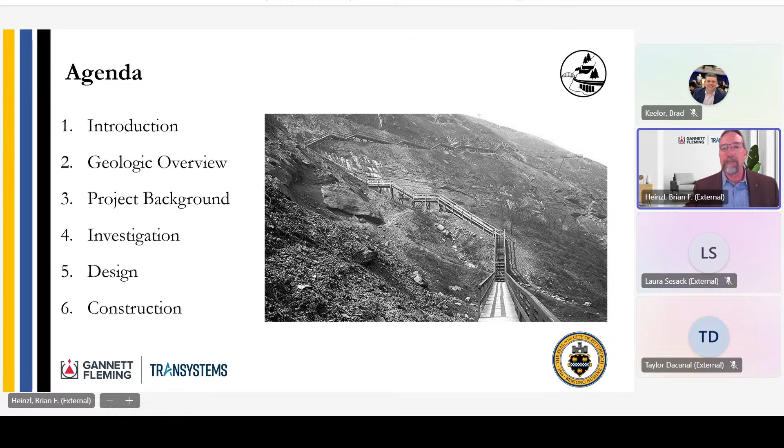Before we start into the specific projects, the project team, Gannett Fleming, is working for the city of Pittsburgh. The city obtained a grant through FEMA, facilitated by the Pennsylvania Emergency Management Agency. We meet with them monthly on progress to bring these 3 projects to completion. I believe we started on these in 2021, and they should all finish by the end of this year.

Before we get into the specific projects, I wanted to go over some of the geologic background of Pittsburgh. You see the Golden Triangle right there in front of you. These 3 sites are up on Mount Washington, which is a steep valley slope. This map was generated by Allegheny County, and it shows that all of these slopes around Mount Washington are susceptible to landslides and rock falls.

This is some of the common geotechnical constraints we face in Western Pennsylvania. We have deeply incised valleys downcut through geologic time, with steep slopes and stratigraphy that includes competent sandstones interbedded with weaker claystones, shales, limestone units, and coal seams. The less resistant units degrade faster than the resistant units, causing rock falls and toppling, and also causing colluvial deposits at the bases of the valley or on intermediate slopes where less resistant units lie on top of more resistant units.

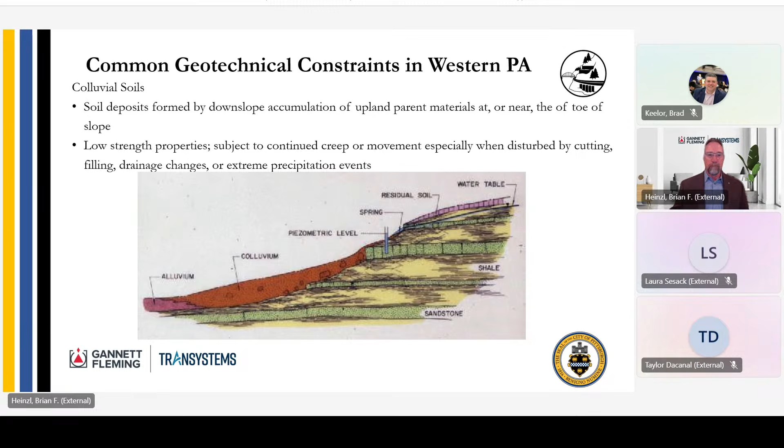Oh, going the wrong way. Hold on, there we go.

This is a geologic section of Allegheny County. We've outlined in blue some of the prevalent marker beds: the Pittsburgh coal, the Ames limestone, and the Upper Freeport coal. Also shaded in red are our problematic red bed claystone seams, being the Schenley red beds, Pittsburgh red beds, and some other red bed units. That's the setting of this project.

Our project is basically on Mount Washington. I believe the Pittsburgh coal was near the top of Mount Washington, which was named Coal Hill back in the industrial age, and is now Mount Washington, because that's probably not very aesthetic to call it Coal Hill anymore, except for us engineers.

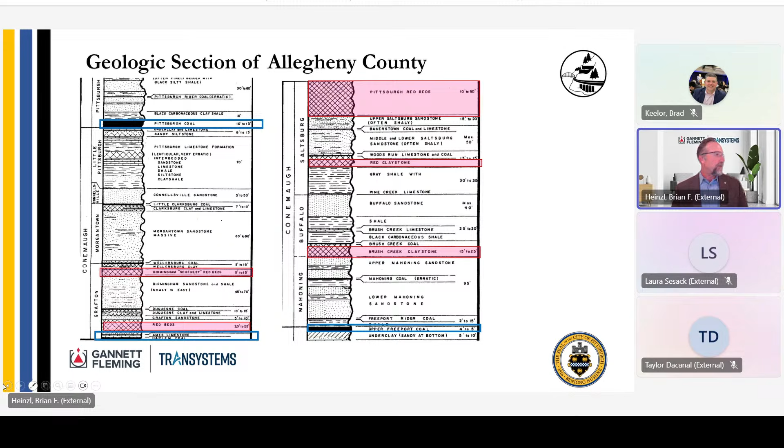We'll go on to the project background. We have 3 sites that the city obtained a grant for through PEMA and FEMA. This is the Greenleaf Street site, a catastrophic landslide area. The Reese Street site is a smaller slide but has some important properties around it. Above the Liberty Tunnel, the William Street site has several instabilities, landslides, and rockfall issues we were addressing. Our objectives were to protect the roadway and properties, and also consider the city's Emerald View Park, the green space all around Mount Washington that's undeveloped land, with a series of trails the city maintains.

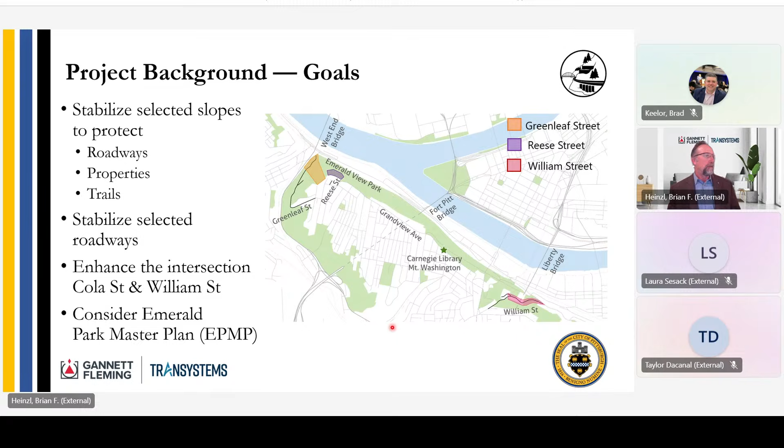This is the Reese Street site. This is the top of Mount Washington. There's a radio tower on top of this building, not visible in this view, but very important to the Pittsburgh area. A landslide occurred behind the structure, and this retaining wall supports the structure shown here. The material moved downslope, creating steep outcrops encroaching on the Emerald View Trail, which runs below the site across the middle of the hillside. There's potential for rockfall and slide debris to impact the trail and other infrastructure downslope, including the railroad and the major state route at the base of Mount Washington.

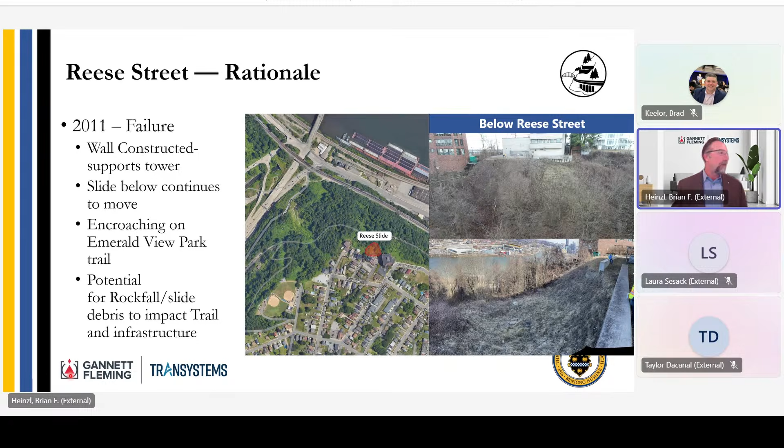Our objective was to construct something to mitigate this slide. This is the typical section we came up with. Our treatment was here, in the slide area below the wall. What we came up with is a structural barrier of closely spaced caissons to restrain the upper slope movements above this steep rock outcrop.

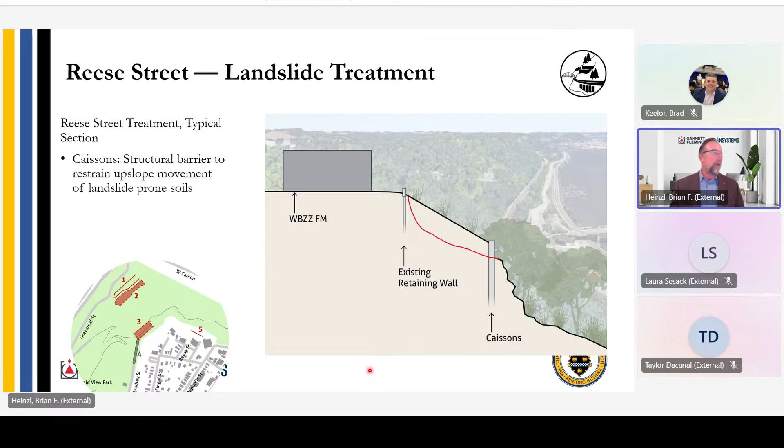And this is just the limited disturbance for our project site. We stayed up out of the park for the most part, and we were up against this high-rise building next to us, and this is the radio tower just above us. So it was a very, very tight site.

It's called Reese Street. Reese Street is a city street that dead ends at the site, but you can't access the site here, and I'll show you in a minute - I think there's other better photos. The local residents have appurtenances built around their structures there.

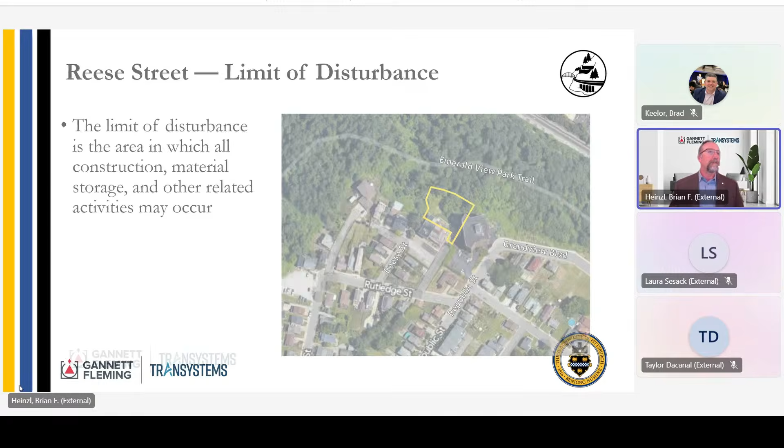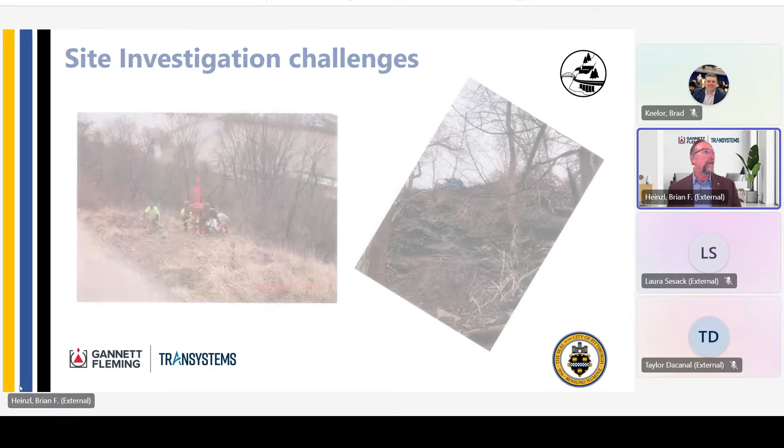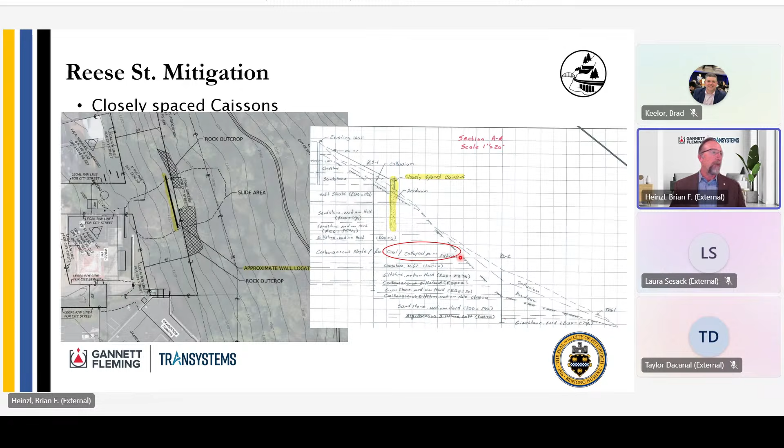So, very challenging terrain. This is our typical section here, and this is the depiction of the site with the trail. This is where we wanted to construct the caissons through the slide, and this is it in cross section. Through our subsurface investigation, in some of these borings, we did find the Pittsburgh coal horizon that I mentioned - a coal and collapse mine interval here that we had to address prior to constructing the caissons.

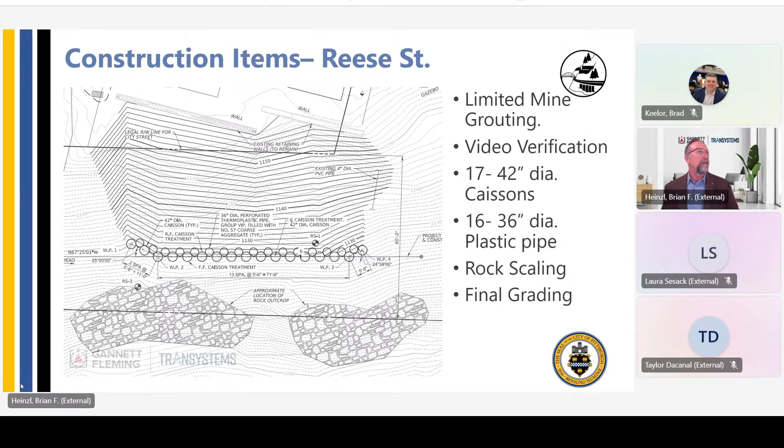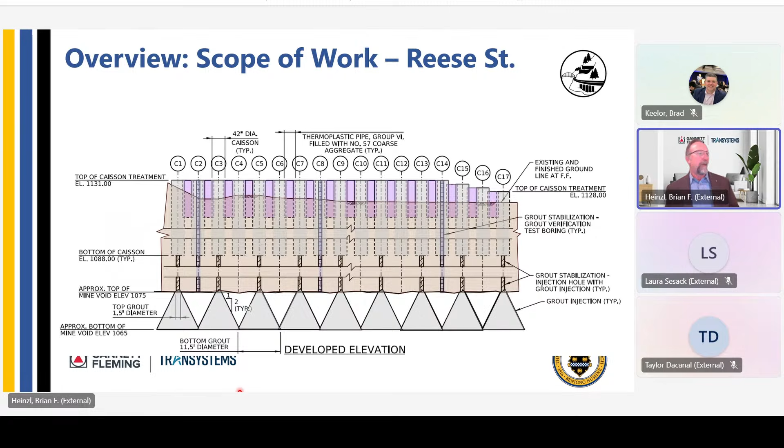We had a little bit of reveal here, and I'll show you that. This is basically some as-directed rock slope scaling. This is kind of what we had to come up with, a way to convey to the contractor which rocks to take off the slope.

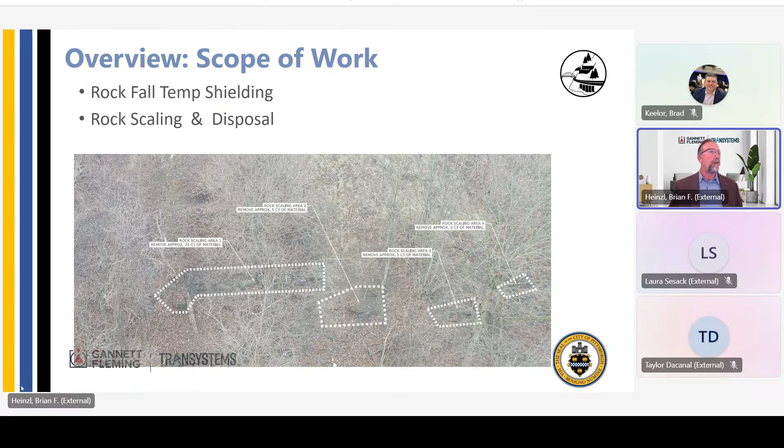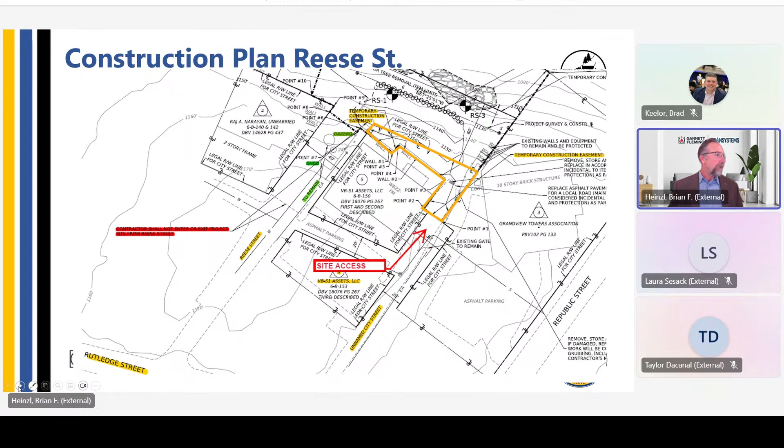And then here again, this is a construction plan showing the access at Reese Street. All these appurtenances were to remain. So we basically came up through the alley with all the equipment and down on this little postage stamp of a site. You'll get a better perspective of that with some of the construction photos.

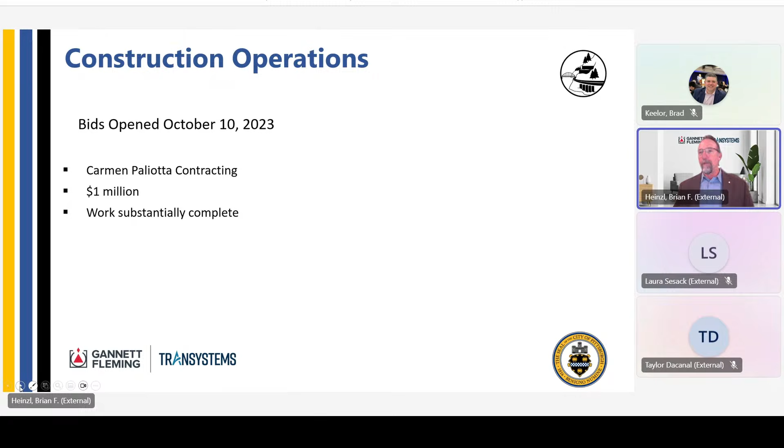Construction bids were opened in October of 2023. Awarded to Carmen Paliotta Contracting, a local contractor, for about $1 million. And the work right now on this site is substantially complete.

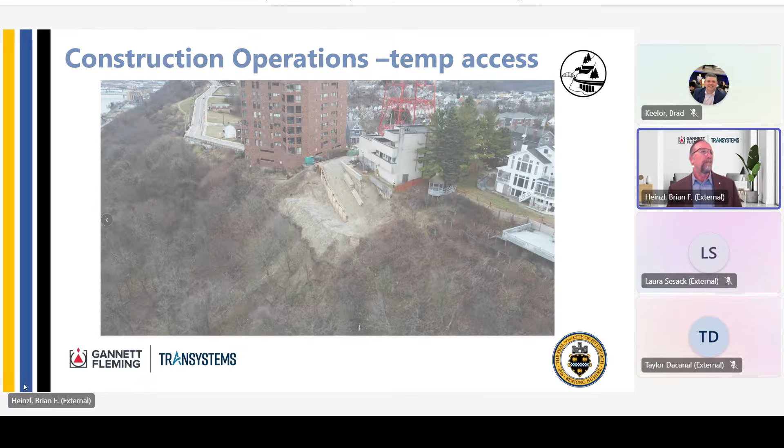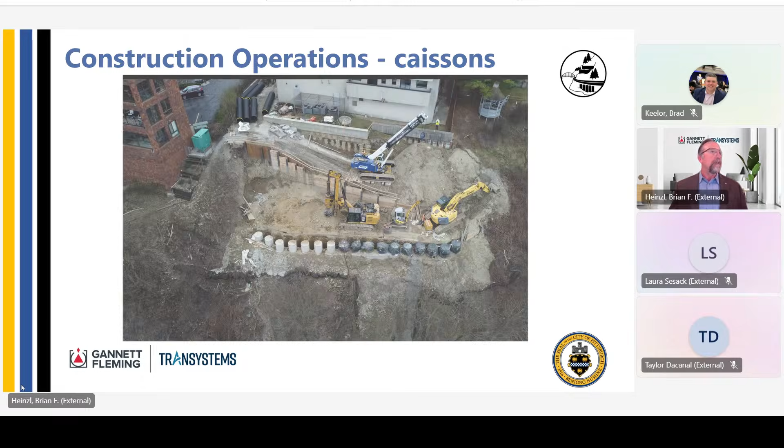To create this bit of, I think it was a 5-foot reveal we ended up with behind here, and then some regrading filled this all back in later when they removed all the temporary measures. And then this is basically the completed site. This was done, I do believe, by - I think this is April or May. So this one was substantially complete.

One of the things the city wanted us to do here - you can see all the caissons here - we had added pigmented concrete to the top of each pour, so this would blend in and you wouldn't see, what everybody calls it, the ugly gray concrete wall sticking up in the middle of the hill. That was very, very important to the city there, especially because it's part of their Emerald View Park.

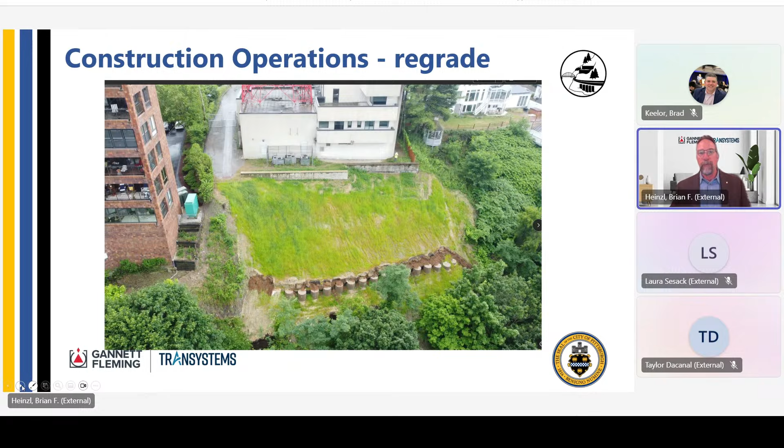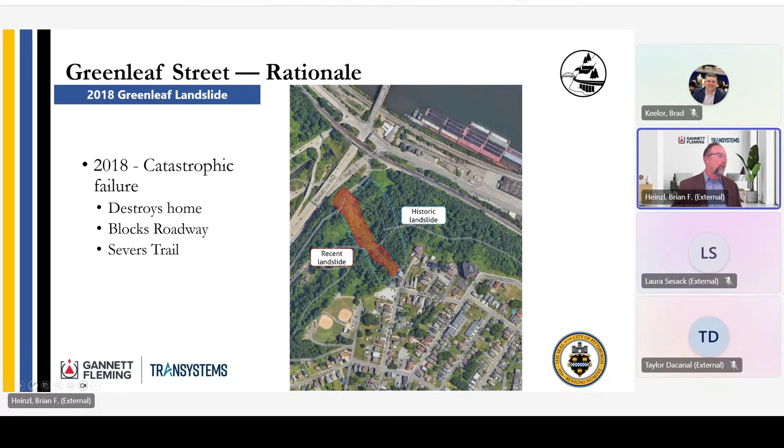So here's an aerial view of the catastrophic failure. 2018 was basically one of the years in Pittsburgh that we had a record amount of rainfall, which triggered a lot of landslides. Those of us that are local geotechnical engineers were very busy that spring trying to repair infrastructure, kind of similar to, but not nearly as bad or widespread as what's going on in Asheville, North Carolina right now.

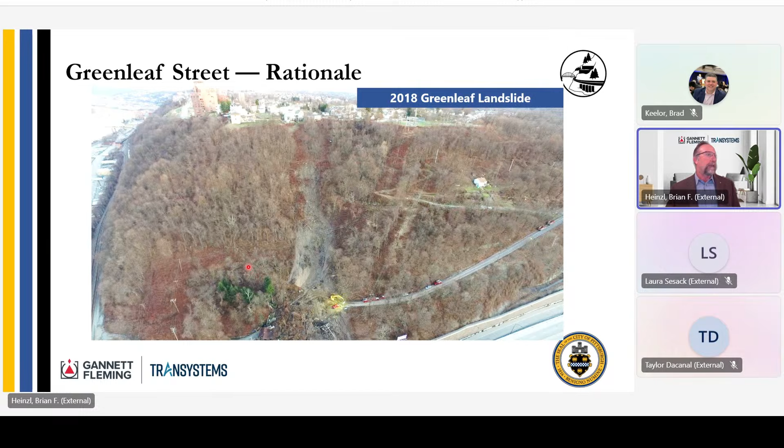Luckily. So this is the house that was removed. It was here, so you can see this was the trail came up across the site here at the headscarp of the slide. This is part of an ancient landslide area here that was also reactivated because of all the moisture and some other influences that caused this failure.

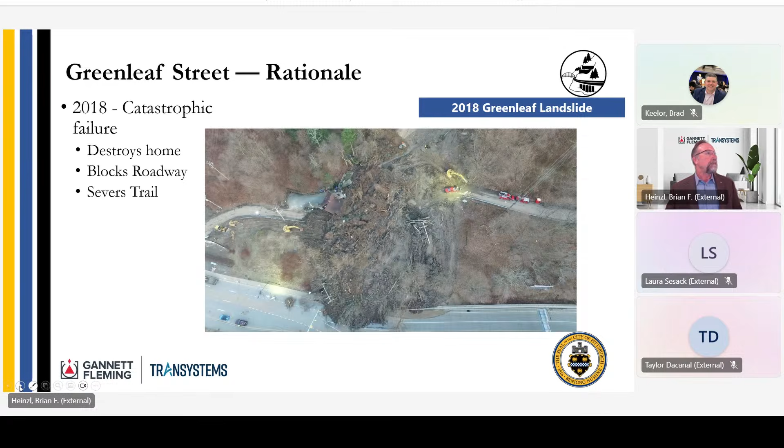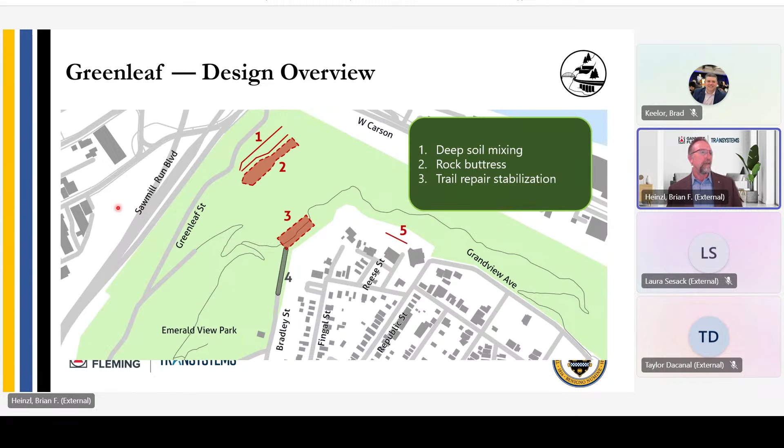So we came up with a couple of different designs, and because of the depth of the colluvium here at the base, we came up with some deep soil mixing lines, represented by these two lines of material, and a rock buttress on top of that, and then up here a separate remediation for the trail. Basically, we have a combination of micropiles, geogrids, and soil nails because of some of the site constraints here.

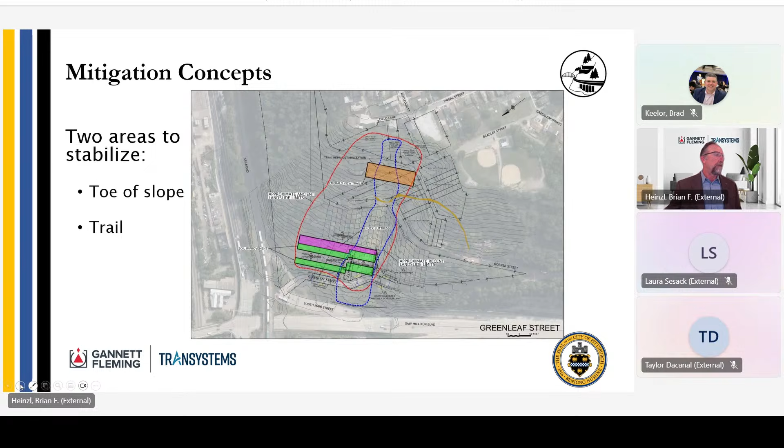So we came in here with some deep soil mixing panels. I believe the widths changed. I think their lower one was 15 feet wide, and I want to say there were 10-foot spacing, 4-foot thick panels at a 10-foot spacing. And the upper one, I believe, had some different shapes and sizes, 30 feet by 4 and 15 by 4, I think, when you get out into the ancient landslide area.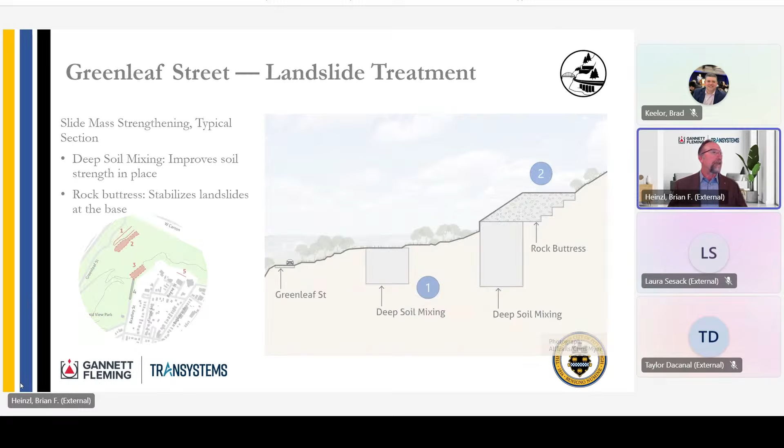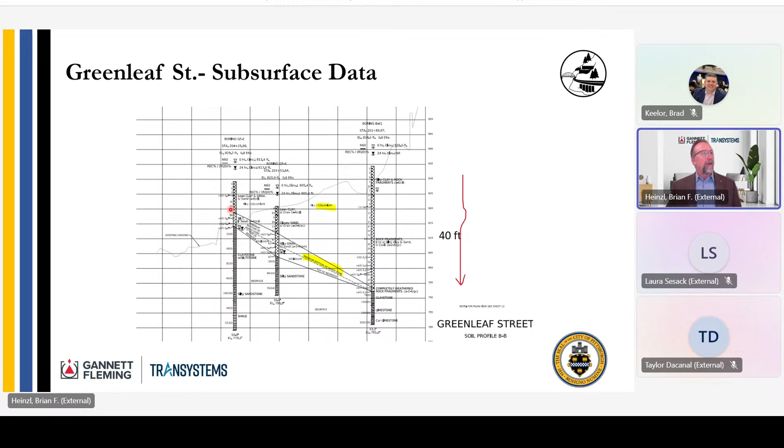And we came up with a minimum bottom of mix zone. These were our targets on AA, and then you have the same thing on BB, which is kind of the opposite direction of the boring. So this wasn't something that we could come up with a single specific section or depth. And that's kind of one of the reasons why we went with deep soil mixing, because it's a little versatile. You can have one panel a lot deeper than the other, but we did need to get the 40 plus feet with these theoretically.

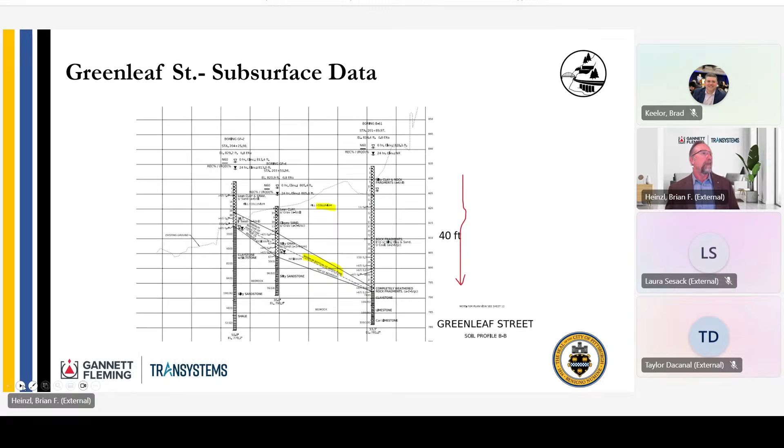And this is some of the segments. Like I said, we had 3 different treatment segments here. This is through the active slide. This is Greenleaf Street, where we did some roadway reconstruction. And this is another line of columns through the ancient landslide area. We actually had 2 there, and then the rock buttress up above.

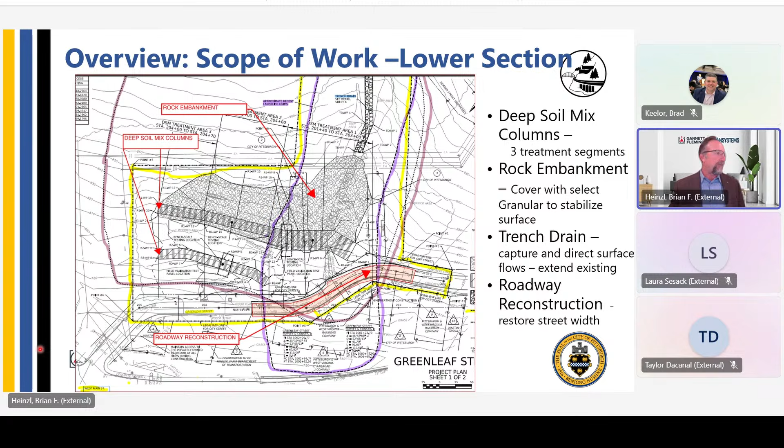We stopped this rock buttress at this location, which worked out well. There's some wooded area up here that seems stable from this tree line. But we have a lot of power lines running across this site, so we can only build our rock buttress up so high and still get under the power lines without interrupting any of their facilities.

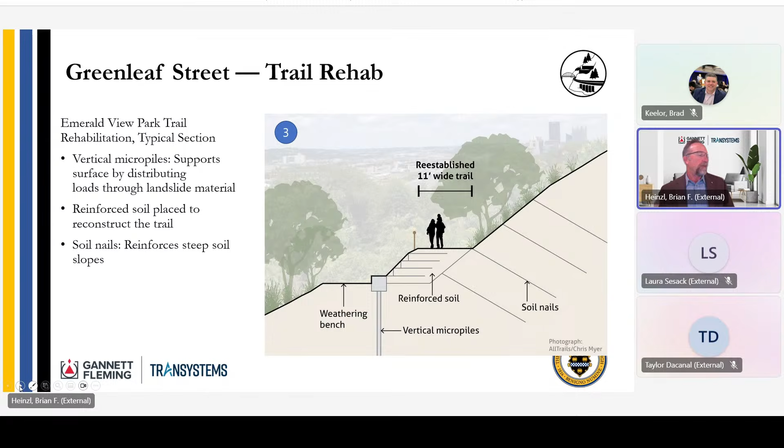And this is the trail area. This was pretty much obliterated by the slide, and there's a small walking path here. So what we're doing is rehabilitating this with soil nails on the slope to create our path, then build the path up with geogrids and reinforce it with some vertical micropiles down into competent material with residual soils and bedrock.

This cross section shows our residuum. The bedrock is not too deep. These are 10-foot sections, so we were able to do something a little smaller up here, but we had to get through the micropiles in the front here into the residuum. This area here is untreated - it could still creep, but it won't affect the path for the Emerald View Trail.

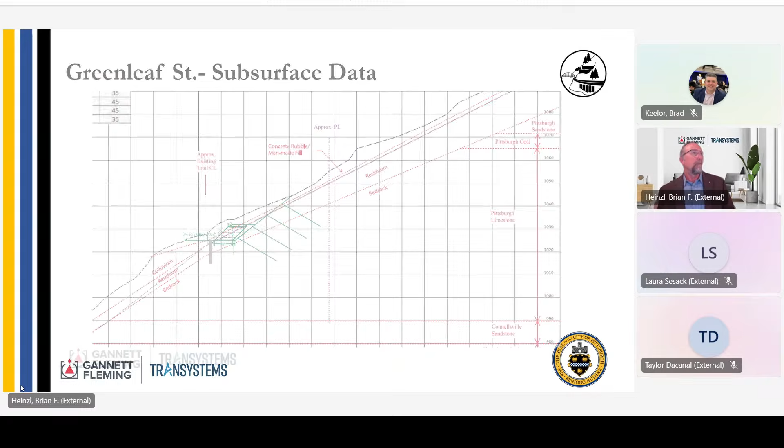I guess the sequence would be cut this down, put the soil nails in, put the micropiles in, and come back through with the geogrid reinforcement to recreate the path. I do believe this is 200 to 300 feet across here total.

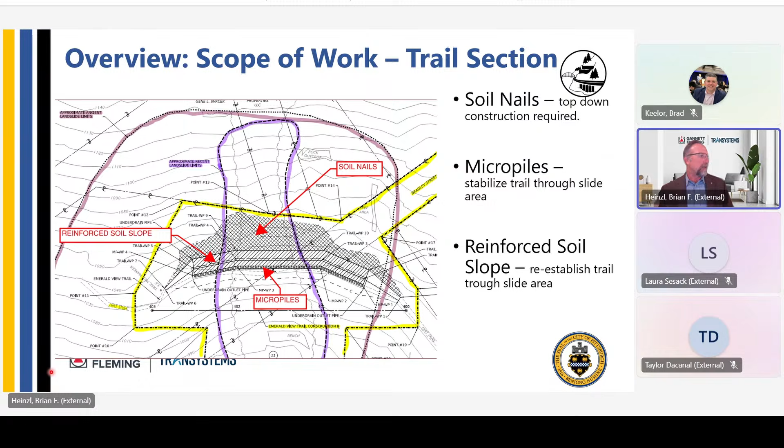So again, these bids were open at the end of last year. Carmen Paliotta was a successful bidder on this one as well. The contract price is $4.4 million. The work is ongoing now, and we estimate completion in December. This is the rig they used to create the deep soil mixing.

Actually, they did a VE. They didn't mix soil - they came in and did partial displacement concrete piles overlapping, creating the same panel, which saved us time for testing and sampling test panels, because we knew what the concrete piles consisted of. So the contractor had his engineer go back and verify the stability worked out with the deep partial displacement piles, so we continued with that.

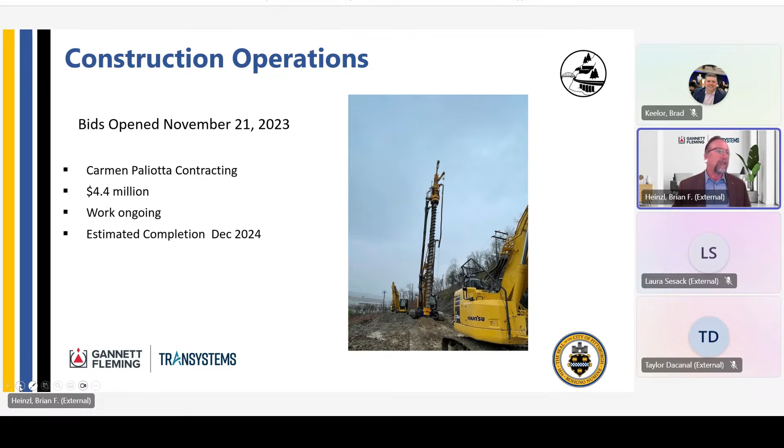They're working on that right now. This is the upper bench, I believe, some of the colluvial area, creating a working platform for this machine to travel back and forth, creating the panels.

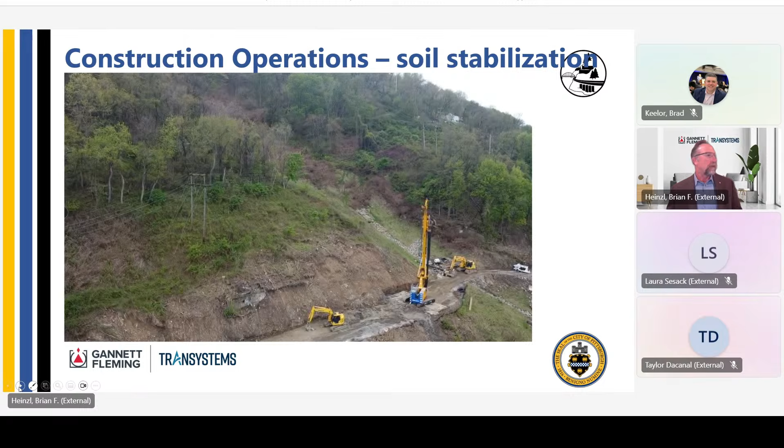And this is just another view from below. This is Greenleaf Street here. The upper panel here is complete, and they're working on the lower row now. You can see this area here was the partially repaired active slide from 2018. The city installed some drainage here and did a bunch of earthwork just to remove the slide debris.

So we're going to do some of the improvements on that. I don't know if you can see the utility lines coming up through here, but they go right over the rig there. This is just another view of the bench - I believe all the panels are in - and this is the finished grading of the lower bench, as you can see down into the west end and the west end bridge in the background there.

So you'll see a rock buttress up across here. The objective here is we will build a rock buttress, but we'll also choke it with granular embankment and plant grass and some trees on it, to facilitate the greenery and create the park-like atmosphere for the city.

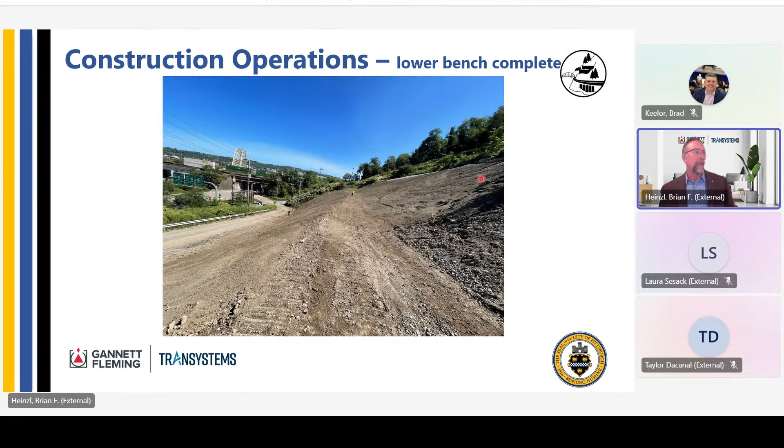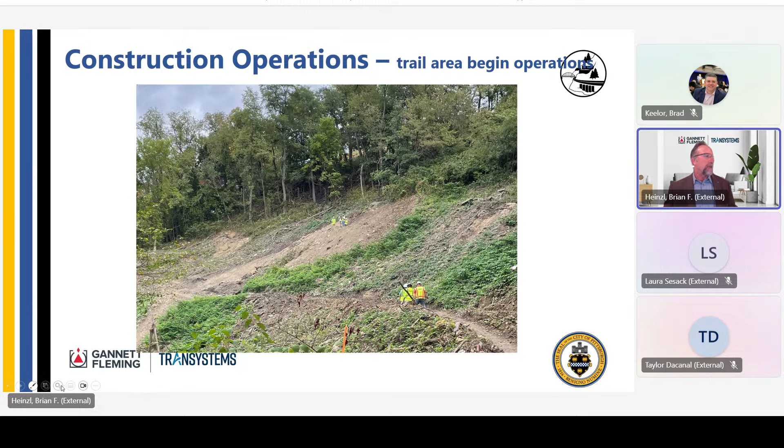This is the upper part, which the contractor is just getting started with. This is the trail now coming across here. This is the headscarp of the old active slide, and they're creating a bench here that we're going to do some test soil nails on in the next week or so.

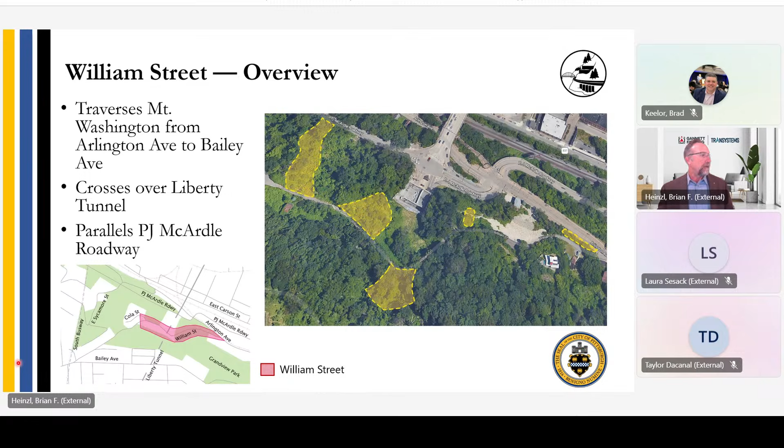And this is a view of the street. The street was a narrow one, one lane down the hill here. It was closed off. It's been closed since 2019 since the activity there. I do believe 2018 this area was closed. I think other parts of it were closed too. It was open to here, but then the other slide I showed you in 2019, the lower portion was closed.

I'll move forward here. There's a lot to cover on this site, which we won't get into very much due to time, and we're still working on it, but we can come back and recapture this at some other later date.

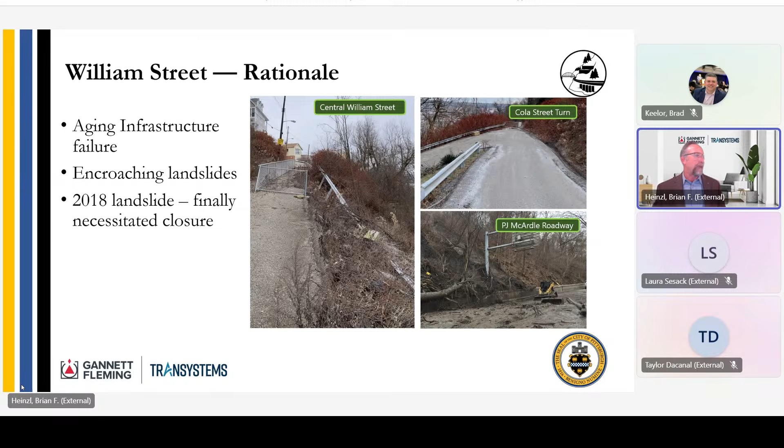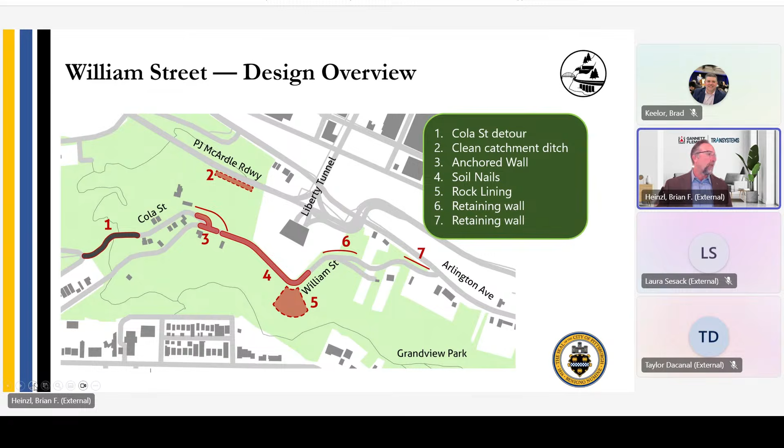Based on some options we looked at with the city, we determined this portion of William Street would remain closed to vehicles, but we'd reopen it as a shared use path for pedestrians and bicyclists, allowing access to Arlington Avenue bus lines and Bike Pittsburgh, but no longer vehicular traffic. So we were able to narrow the section up a little bit.

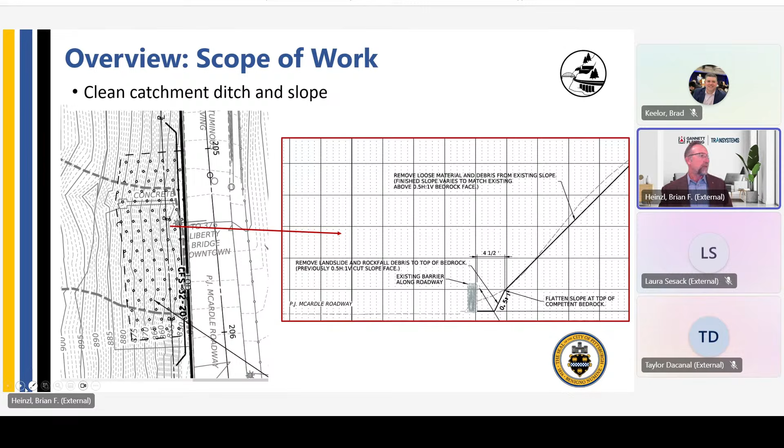This is just a view of cleaning off some of the slide debris. We cleaned out the ditch here, which actually worked pretty well. We had a limited closure on P.J. McArdle Roadway—it's a very active thoroughfare from Liberty Bridge downtown to Mount Washington for daily commuters. We were able to shut it down over a weekend to do this cleanout and remove a lot of the slide debris, which was very successful.

This is a depiction of the anchored wall. The new Cola Street turn—William Street is up here. You can see we moved Cola Street out, made it a little wider on that reveal, and this is the anchored wall below it.

Here's a plan view of the similar thing. Again, I wanted to highlight the intersection improvements. This was the existing hairpin turn, and now we have a larger radius to allow emergency vehicles to make that turn and service the residents.

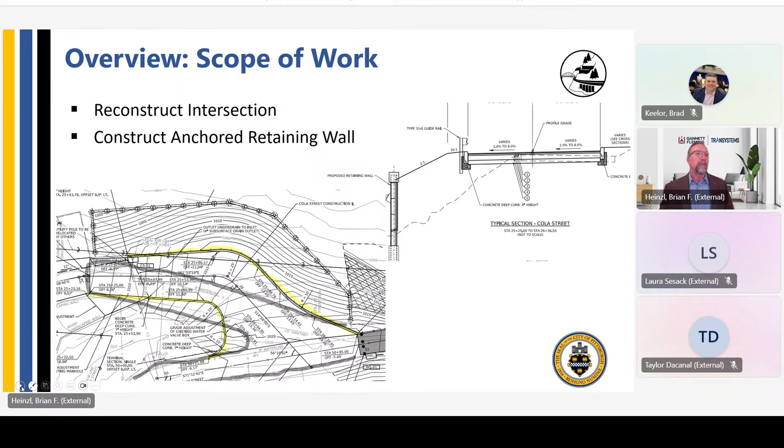This is the converted trail. To restore this area, we designed some soil nails to come in here, and we have permeable pavement going in here, along with a small rock buttress.

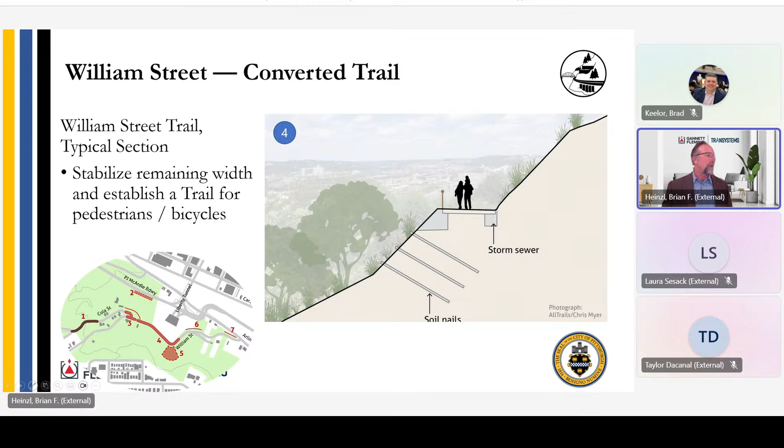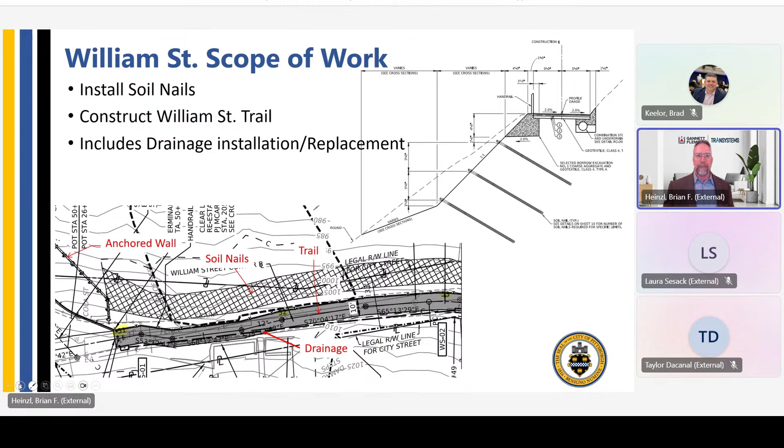Some other areas here—this is a plan view. This is the area of the soil nails, the drainage, the anchored wall, and this is going to be the trail. I believe we had around 300 nails through this area. We have rock lining going in here—I don't have a good picture of it, just a general schematic.

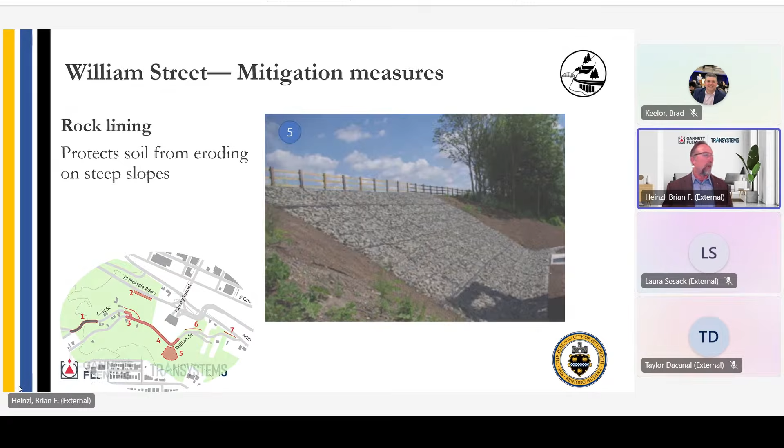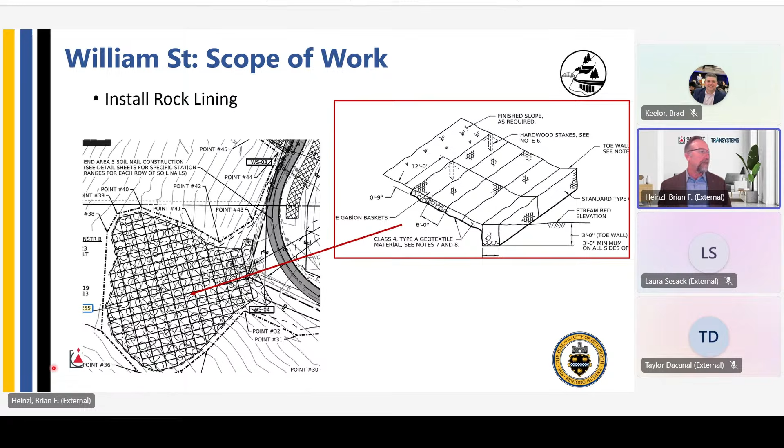We have some mine drainage or surface drainage seeps coming out of the slope here that remain saturated throughout the year. So we're going to stabilize the surface to keep the soil from creeping and manage the water, getting it into a controlled environment. That's depicted here with this gabion mattress. This will be the William Street Trail coming around, with a little impoundment to get the water into the drainage system that was designed and upgraded as part of the project.

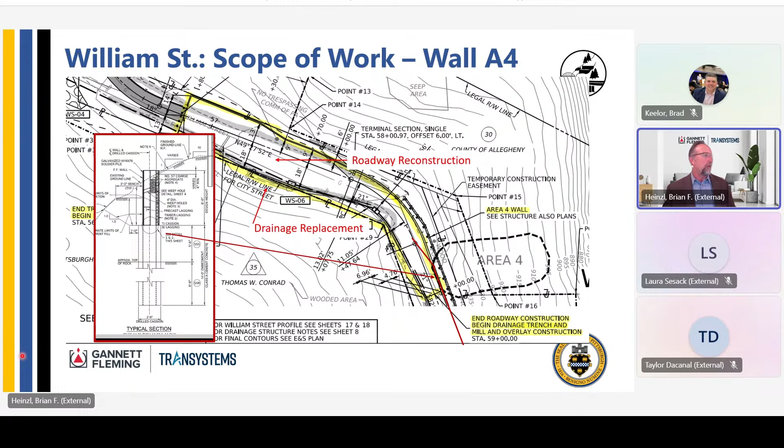And this is the lower wall. Again, there's another resident here. This is the new wall below this narrow street on this very steep hillside adjacent to Arlington Avenue.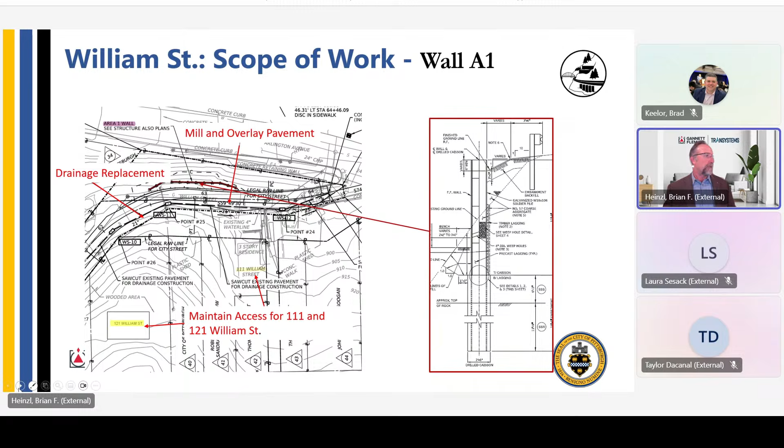And these are some of the ecological stabilizing elements to go with the park theme. We had a bunch of trees planted to screen the walls and live stakes planted in the rock lining to be able to return the slopes into a green park-like setting.

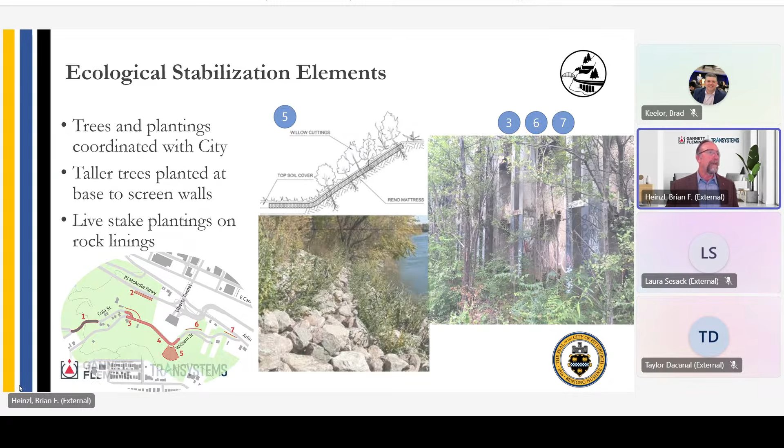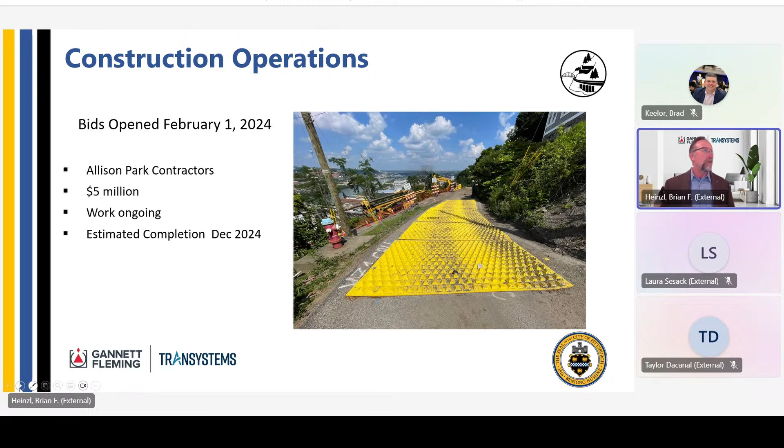And this is the construction here, just real quick. Allison Park Contractors was awarded this contract in February. Overall, the project cost was about $5 million. The work is ongoing, and we expect to finish by the end of December, maybe early January.

This is just some of the photos of this. Is the Cola Street turn here, the new retaining wall that they have all the soldier piles in, creating some temporary access to start putting in anchors.

And this is just to show the tight quarters. This is the resident driveway here that they're trying to leave open. So this machine had to come in here and drill these beams in daily and move and put up some protection so the folks could get in and out when their shifts were over. But everybody pretty much cooperated. We didn't have very much trouble.

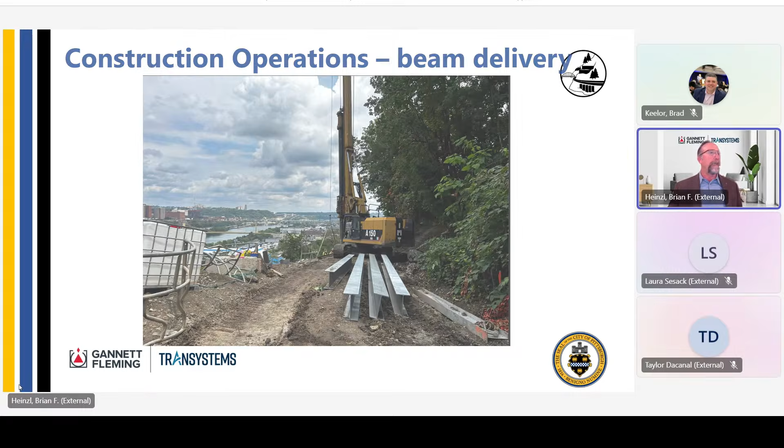The two lower walls are in and complete. This is a view of the new William Street mixed-use trail. The soil nails with TECCO mesh and the plates actually went in pretty well according to plan. The contractor did a good job here. And this will all be planted, and we'll all have greenery on it.

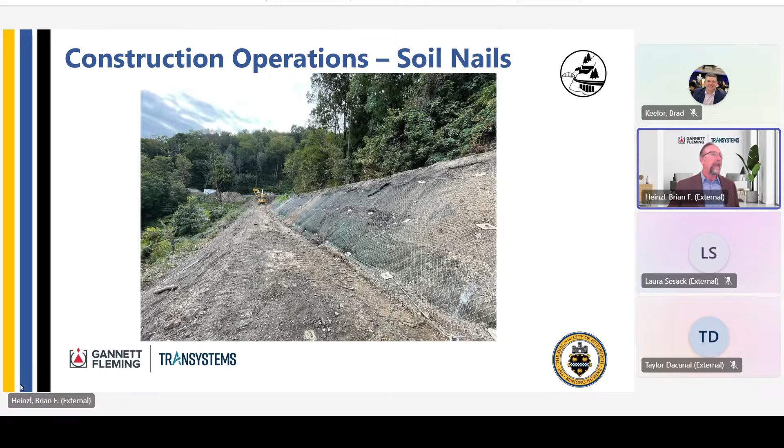This part of the trail will get a handrail for bicycles and pedestrians, and that's not the handrail. That's a temporary railing above that area 4 wall that's across from the driveway. That's just kind of a finished look for the wall.

And again, the concrete panels were all dyed with, I think it's walnut, to try to blend in with the surroundings, so we didn't have the big gray wall sticking out of the hill.

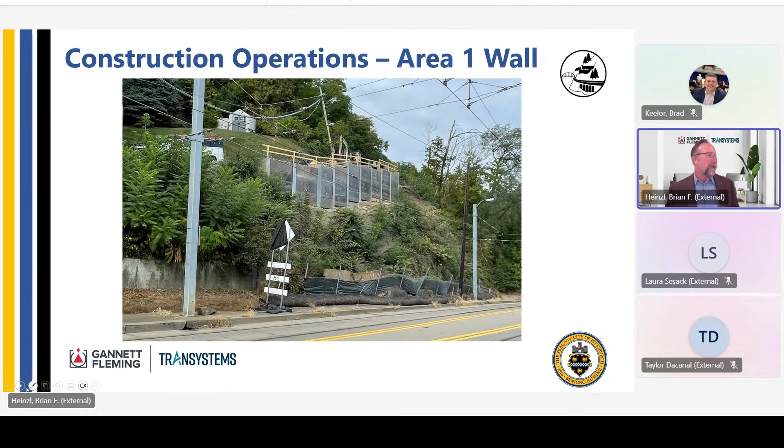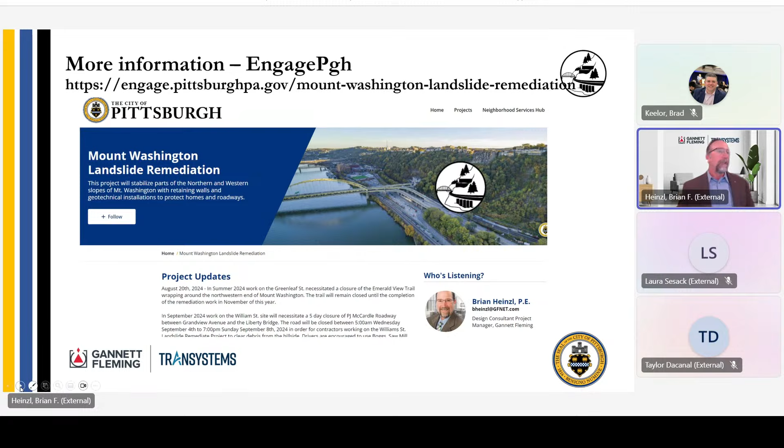And if you want some more information about what's going on out here, I invite you all to look up EngagePgh, engage.pittsburghpa.gov, and go to the Mount Washington Landslide Remediation. There's more information and background on this website that the city maintains.

And that's all I have. So if anybody has any questions, I'll be happy to entertain them. Throw it back to you, Taylor and Laura.

Great presentation, Brian. Really informative. We really appreciate it. Your last project, you mentioned the Liberty Tunnels, and for those of us who are local to Pittsburgh, the Liberty Tunnels have officially been open for 100 years. So I know that the ASCE Pittsburgh section is trying to maybe have a few events around that or commemorate the tunnels in some sort of way. So if you're in Pittsburgh and want to keep up on that, keep an eye out for the upcoming ASCE events around the tunnels opening.

All right. Yeah. Go ahead, Taylor. Start us off with some questions. Are you ready, Brian? I'm ready. Have at it. What did I leave out?

I guess the construction is super interesting on all of these locations. So what would you say is the biggest construction challenge that you have, maybe per site or just in general? I think in general, what we had to consider is mostly the tight constraints, staying within the city's boundaries, the street right of way or temporary access that we acquired, or trying to minimize any impacts outside of that and still get the equipment in there.